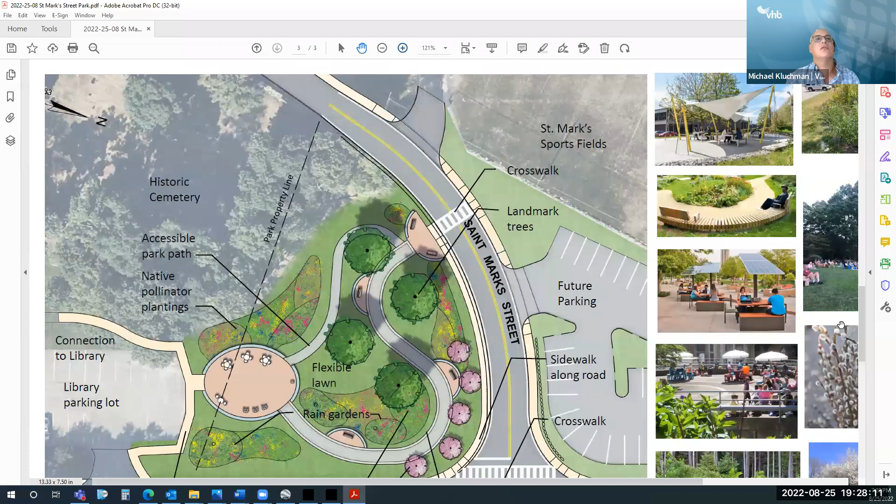So again, this idea of quotes and poetry in stone, I think is really appropriate. But again, we can take a step back from that.

I think especially this group with your expertise with history and the library really could probably do some good research and find some really good things to be engraved. But I did like this example, so that's another direction.

A couple other things on here: I think the memorial can speak for itself, but there may be a place, depending on how abstract the memorial is, to have a more traditional interpretive sign, like this.

This one is the design of these. National Park Service and a lot of places use these. The reason they're set at these angles is they're accessible - you can roll up to them if you're in a chair and read the material and get next to it.

So this is very much a standard of how you do these interpretive signs now, where you're sharing text and information. And as you develop the park design, there may be a real place for something like this, which really explains what's going on, why the memorial's here, the history of the site.

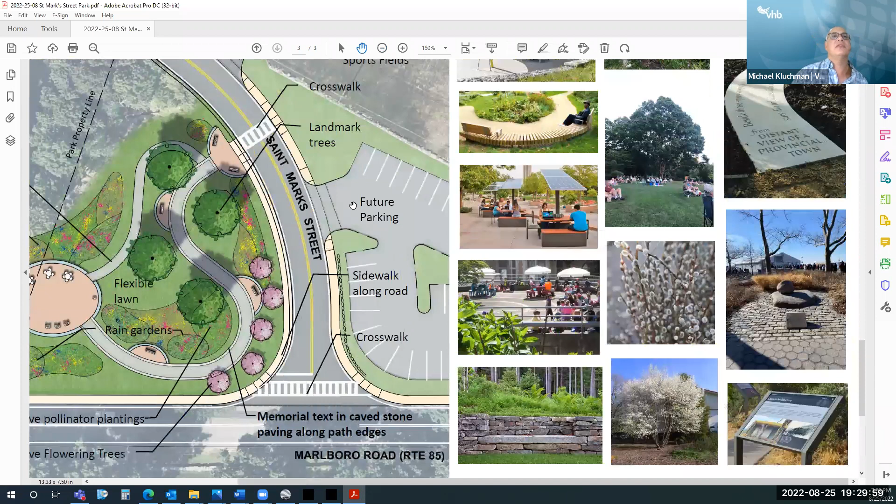And certainly things have been found. One thought that ran across my head as I was laying these out, and what these things could be - here's a piece I showed you at the last meeting.

I showed the group the Salem Witch Trial Memorial, and this is a little piece here where there are quotes from the trial transcripts. This memorial also has a wall with names of people who were accused of witchcraft, who were executed, set in the wall. So there's all kinds of pieces to that memorial.

One thing I thought, especially with your work with the archaeologist and what you find, is part of this, and maybe it's on a sign here - I don't know if the group is familiar or has been to a college ceremony recently, but the idea of a land acknowledgement could be something you even express in the park.

For those of you who aren't familiar with it, it's something that will happen in a ceremony. Many colleges and other institutions use it, where before a ceremony they'll acknowledge that this was tribal land and the tribes who lived there, and their view of the land.

I think that's an important thing to acknowledge, especially with your direction you gave. I don't say you have to have it, but it's just a thought, and really getting away from the idea - somebody brought up a very good point.

You didn't want the memorial to look actually like a burial, like a headstone. And I think it's a really good point, especially when you think about honoring non-Europeans. The idea is, in a lot of those cultures and philosophies, they're not separate from the land - there's a real strong tradition that if they're here, they're part of this site. So I think having a memorial that integrates with the landscape is really powerful.

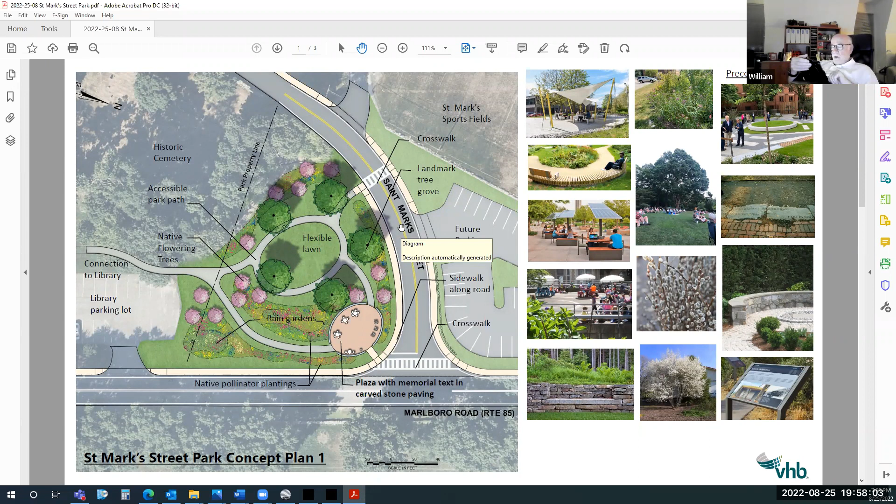If in fact people want to sit there, converse, enjoy, have some sort of story discussions, whatever that turns out to be. On plan number 3, it does also push that plaza area very near the parking lot. Now, there are some advantages to that, but there are obviously some disadvantages also.

It also then presents you with, rather than having an area where one could potentially have either story hours or other types of program discussions, presentations, etc., it doesn't give you that opportunity as much. It does give you a serpentine walkway that runs through there and the ability to veer off and sit in various benches and other areas in those alcoves. But it doesn't give you the ability to do a larger presentation.

Therefore, my observation tends to be that number two, even though there are some disadvantages with that, gives us the best of all of my concerns. It moves that plaza as far as it can be away from sound areas, number one. And number two, it gives you seating areas that potentially are up in or towards that quiet area of the park where, in fact, story hour and other types of things would occur.

Number three, it gives us a general ability to have larger presentations, programs, whatever that might be, using the plaza as the kind of stage or presentation area. It also allows us, if necessary, down on the lower 7 o'clock area of that particular photo, to put additional signage, historical information, etc., in that largely open area down there, where noise and sun and other issues may not be nearly as much of a concern as it would be for other types of things. So I guess for those reasons, I kind of like design number two, to be very honest.

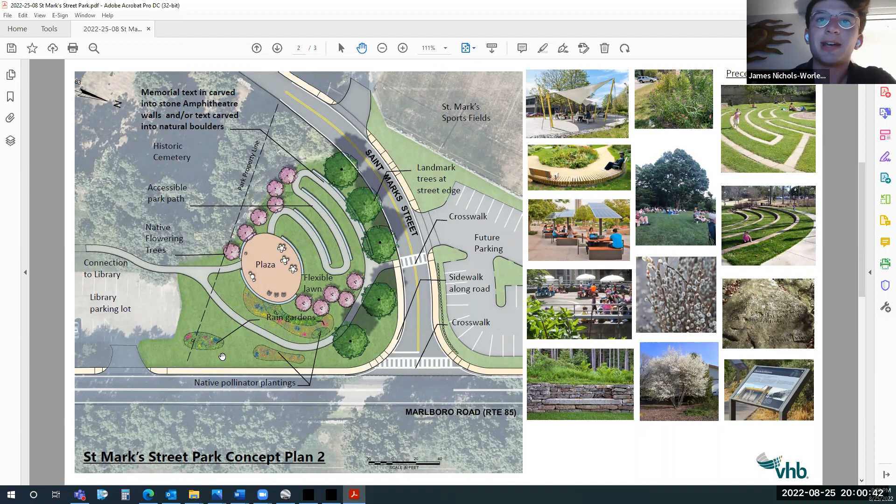I just want to point out something I liked about concept 3, and that is at the library parking lot, that sidewalk. I suppose it could easily fit into any of the other designs, but personally, from the time I've walked there, that parking lot is not the friendliest area in town. I think a sidewalk there would be very beneficial.

And just generally, this third concept design, I think the layout of the paths is very attractive for a potential park, and any small things I could say, I think we could further work out. For example, that plaza, I would imagine it could go further towards the center of the park and away from the parking lot.

Sure, yeah, any minor thing I could say is probably not important enough. I think it's important to remember that right now, what we're looking at is not a park and is in fact an empty dirt lot next to two parking lots. So I'm very grateful for these designs, and I hope we can see something as livable and meant for humans as these. So thank you, Michael.

And thank you, James. That's well said, as ever. Kevin, do you want to give us your input now?

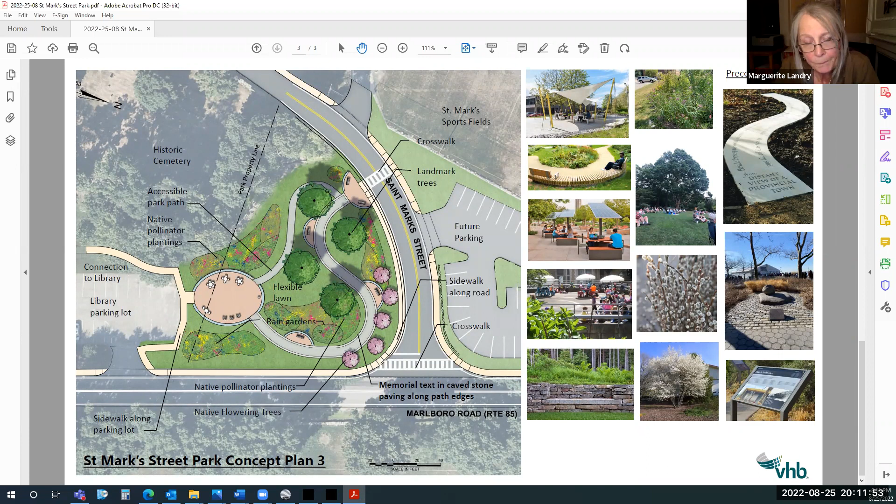This is a public forum. I brought up these same points before town meeting, during town meeting, after town meeting. I have never gotten a substantial answer on why we're spending taxpayer money on private property. And I thought tonight was supposed to be a public forum. There's public comment, but the forum, apparently, from what Freddie tells me, is a different format.

There was a public forum posted for tonight, coming out of the townhouse.

Well, I wish I could be more specific about what is going on with the financial part of it, but I don't have any idea. I'm not on the Board of Selectmen, and I haven't been privy to the conversations with St. Mark, so I don't know.

But you've chosen to recommend town money, taxpayer money, be spent for the design of this. That's engineering money, and I'm not sure it comes from the town or the state. I'm sorry, the DPW budget and engineering budget, there is supplemental money that comes from the state, but the budget is based on taxpayer funded dollars.

It's so frustrating not to ever get an answer on this. I hear your frustration, but I personally have no ability to answer your question.

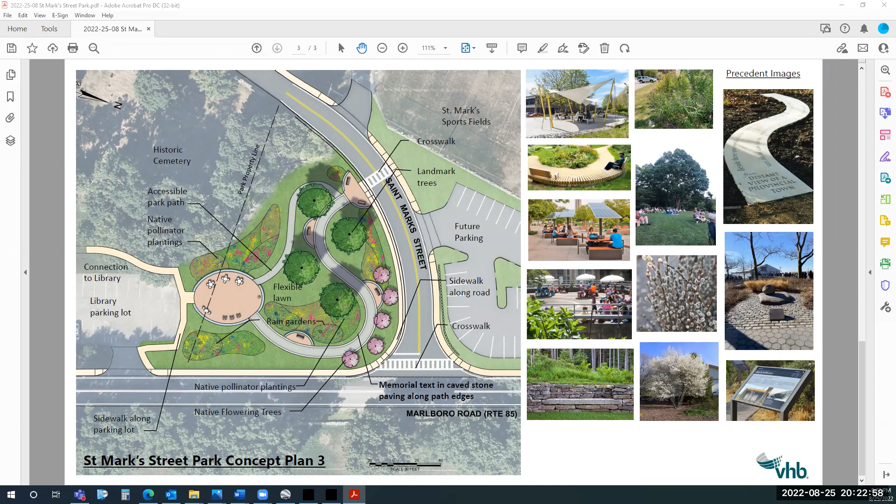So I just assumed this was another one, and that there was some pot of money left over from the prior planning before I was on the committee, used to have VHB come in. On that level, I personally agree with some of the comments about spending taxpayer money before we have more information. I wouldn't have voted to do so, but I wasn't part of that conversation. It was the board of selectmen who voted to do that.

After we had already engaged and spent money, I'm not going to have that battle here. That's why I thought we should slow down and find out from the dig, and plan a public forum, because even though we all bring wonderful knowledge to this working group, we're not the townspeople that a public forum would give us insight into.

I understand what you're saying, and I'd like to say this piece of land is a flashpoint, with an enormous amount of dissatisfaction various people in this town are feeling with other people, boards, and committees. It is politically very sensitive. And to me, the issue is: are we going to work towards something there, or are we going to fault find until nothing happens? I'm going to say one final thing, because I keep getting interrupted and other people don't when they make long comments.

I agree with you. I'm not fault finding. I think this committee needs to work in a way that's acceptable to the town, and that before we spend any more money, we make sure we discuss it and vote on it.